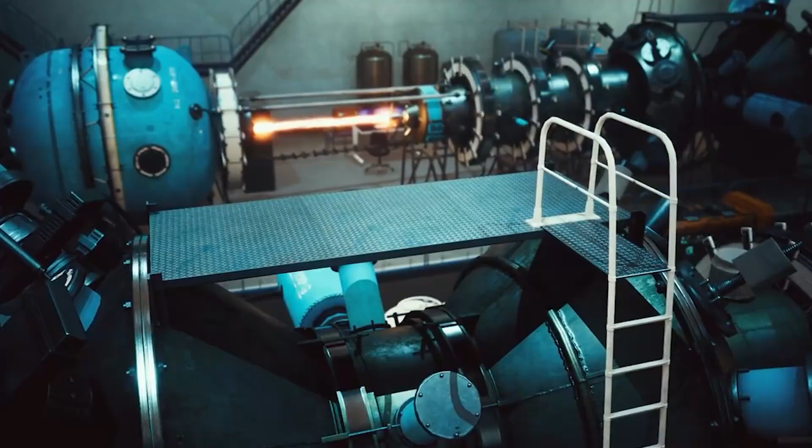And India has achieved a milestone in its civil nuclear program with the country's most advanced atomic reactor. Beneath India's dust, heat, and exploding demand, a strange buried metal is pulling nuclear science in a new direction. Not oil, not gas, not sunlight, thorium. And if India can finally make it work, this reactor could change how an entire nation thinks about power.

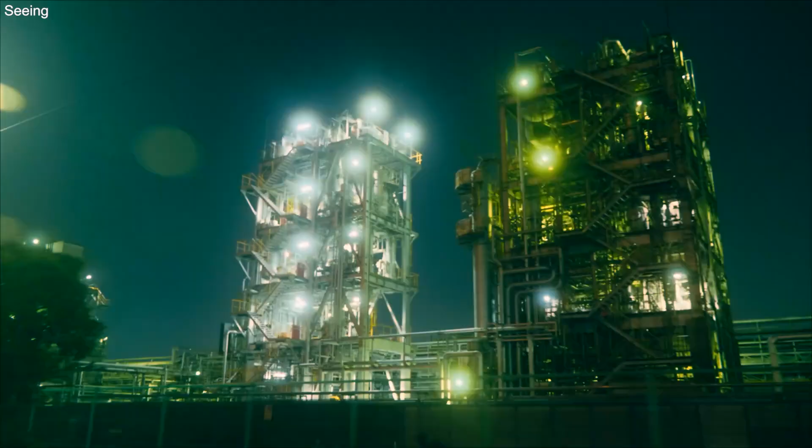The energy hunger of a rising India. India does not need a little more electricity. It needs a lot more and fast. Cities keep expanding, factories keep running deeper into the night, and digital infrastructure keeps multiplying behind the scenes. Every new layer of growth adds pressure to the same system, the grid.

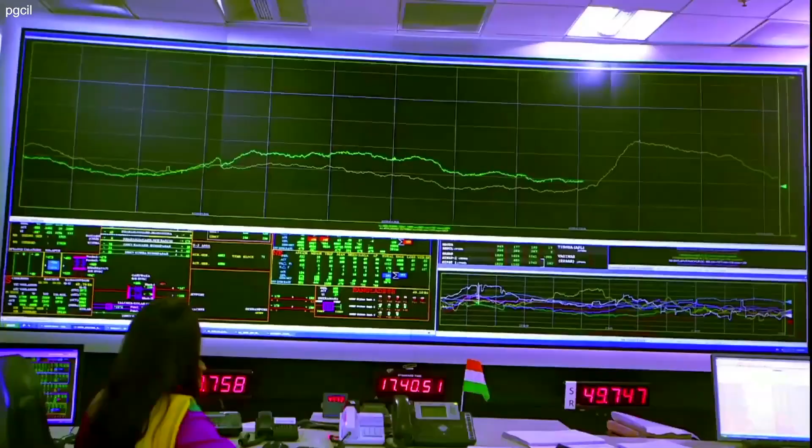That is why energy in India is not just about utility bills or power plants. It is tied to industrial growth, national resilience, and long-term stability. A country building at this scale cannot rely on short-term fixes forever. It needs sources of power that can keep up for decades, not just election cycles.

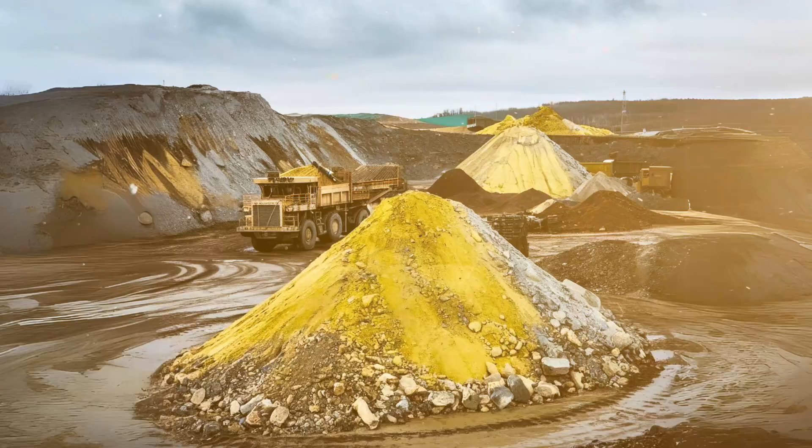And that pressure is exactly what pushed India to think differently. Instead of asking only how to produce more power right now, Indian nuclear planners began asking a harder question. How do you build an energy future around the resources your country actually has? That question leads straight to thorium. Why thorium became India's nuclear obsession.

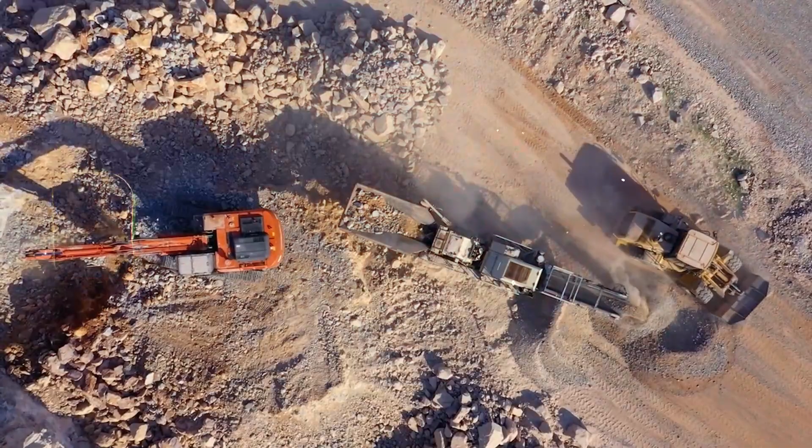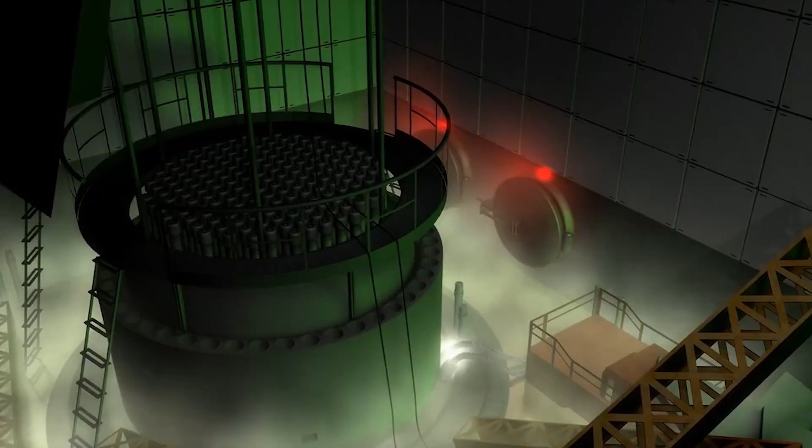For most countries, thorium is an interesting side note. For India, it became strategic. The reason is simple. India has limited domestic uranium, but it has large thorium resources. That imbalance shaped the country's nuclear thinking for decades. Suddenly, nuclear power was no longer just about copying the standard path followed elsewhere. India needed a system that could start from one fuel reality and gradually move toward another. Thorium became important not because it was trendy, but because it matched India's geology.

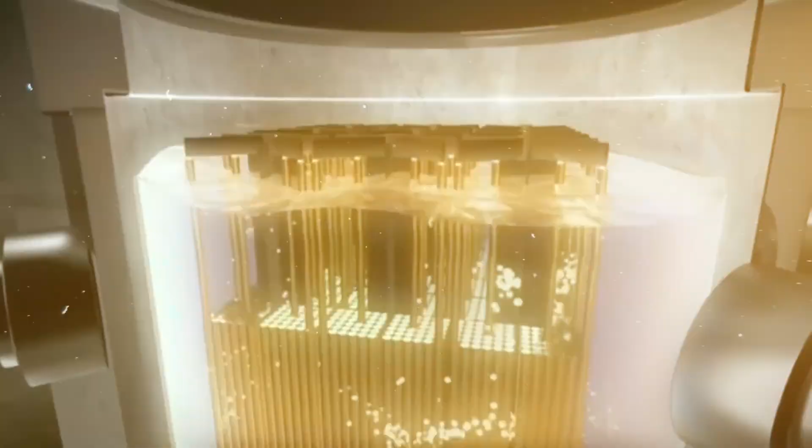But thorium comes with a catch. It is not a ready-made miracle fuel. It cannot just be dropped into a reactor and expected to behave like conventional fissile material. That is why India's thorium push was never really about one metal alone. It was about designing an entire long-term national pathway around it.

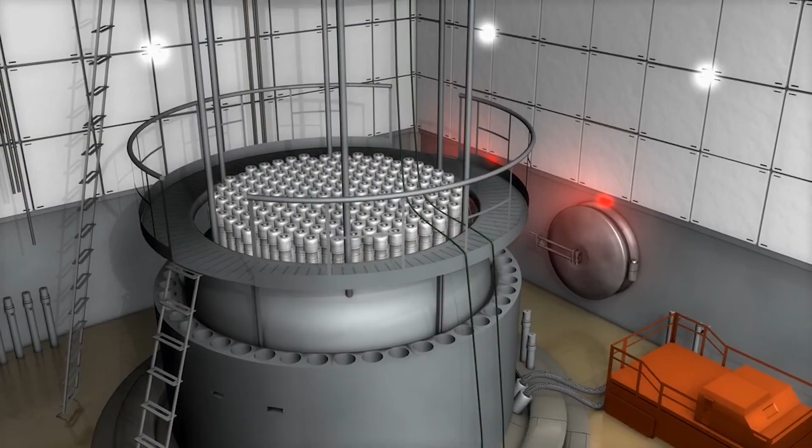The three-stage plan that changes everything. India's thorium story only makes sense when you see the full roadmap. This was never meant to be one reactor showing up and changing everything overnight. It is a three-stage nuclear plan, and each stage prepares the ground for the next.

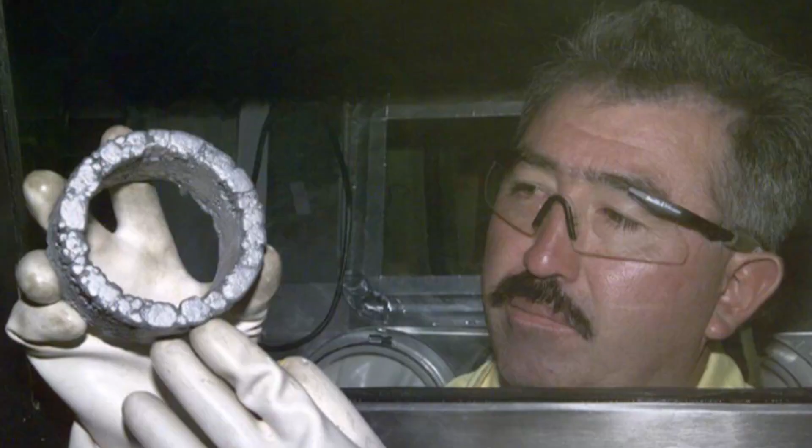The first stage uses pressurized heavy water reactors running mainly on natural uranium. These reactors generate electricity, but they also do something more important for the future. They produce plutonium in spent fuel. That plutonium becomes essential for what comes next.

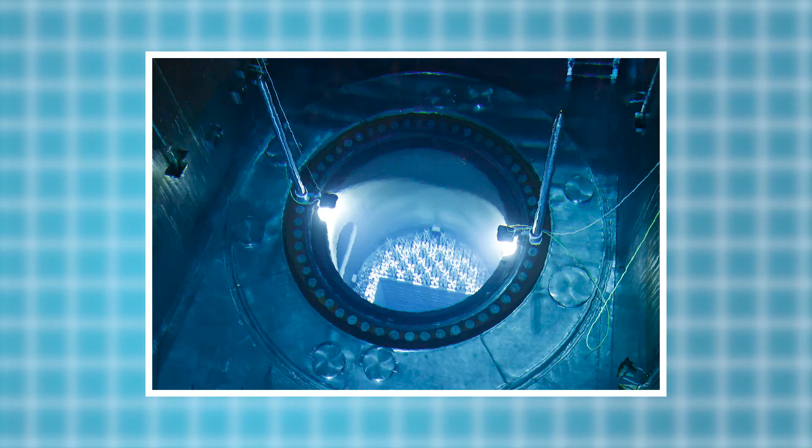The second stage moves into fast breeder reactors. Here, the system is no longer just making power. It is breeding more fissile material and helping create the conditions needed for the thorium pathway to become possible. This stage acts as the bridge between India's current reactor base and its long-term thorium ambitions.

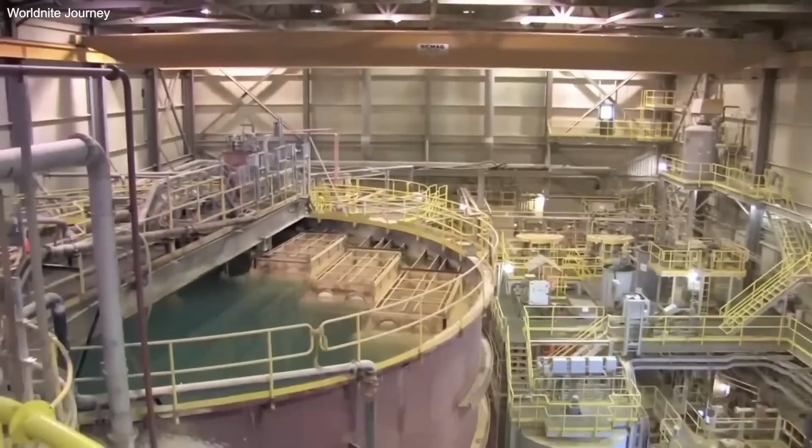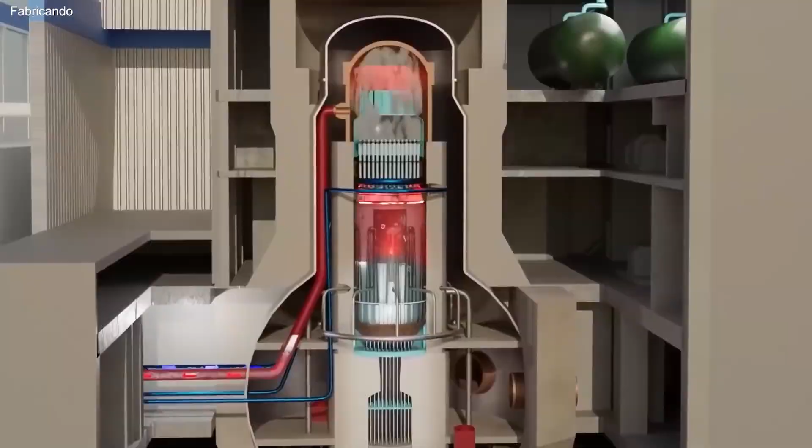Only then does the third stage begin to open up. This is where thorium-based systems can operate at meaningful scale using uranium-233 in a broader thorium cycle. So the real story is not a single invention. It is a patient nuclear ladder built step by step, with thorium waiting at the far end of it.

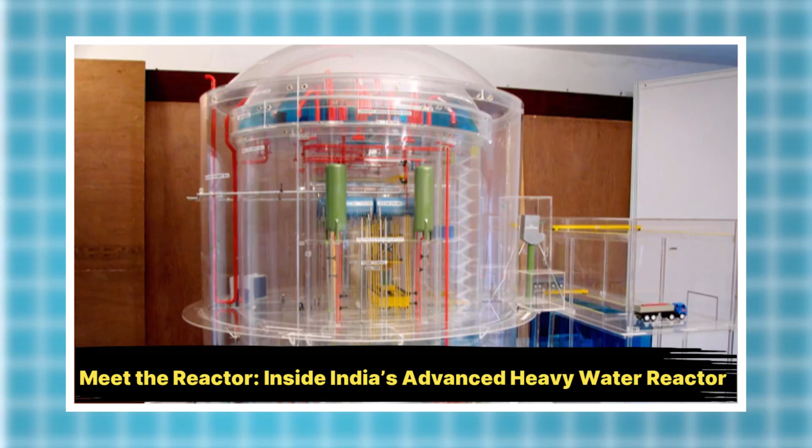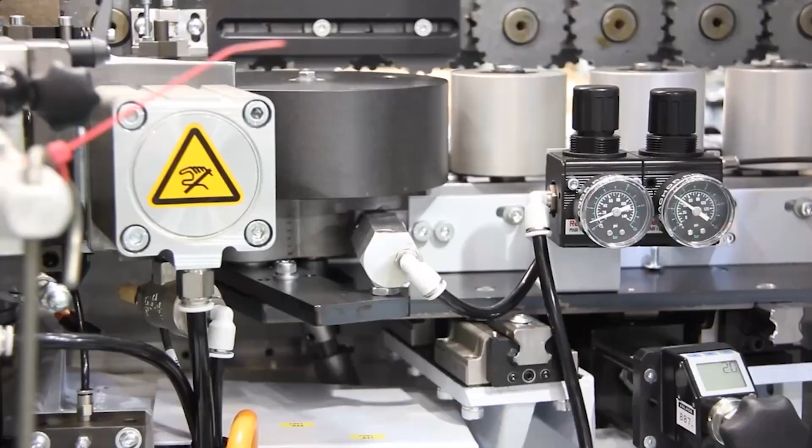Meet the reactor. Inside India's Advanced Heavy Water Reactor. At the center of this vision sits the Advanced Heavy Water Reactor, or AHWR. This is not meant to be some magical final machine that instantly powers all of India. It is a 300 megawatt electric design created to demonstrate technologies needed for large-scale thorium utilization.

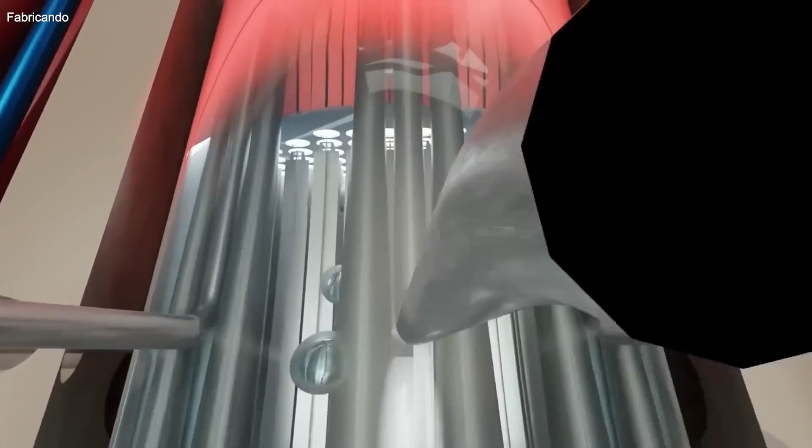That role matters. The AHWR is important, not because it finishes the mission, but because it proves whether the mission can realistically move forward. In India's thorium strategy, this reactor is a bridge between concept and system.

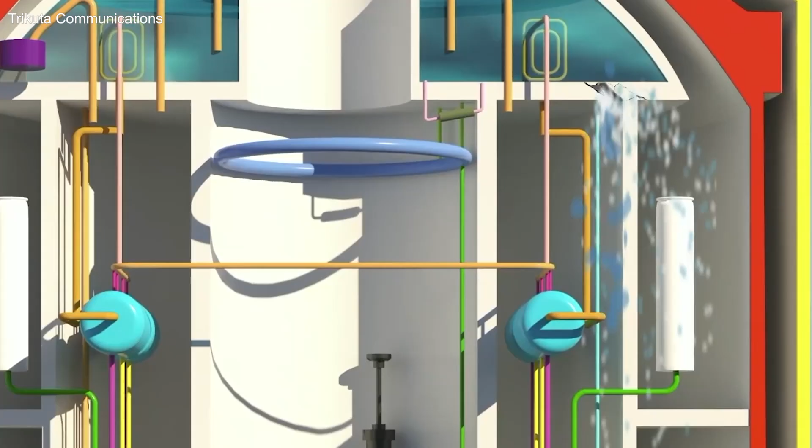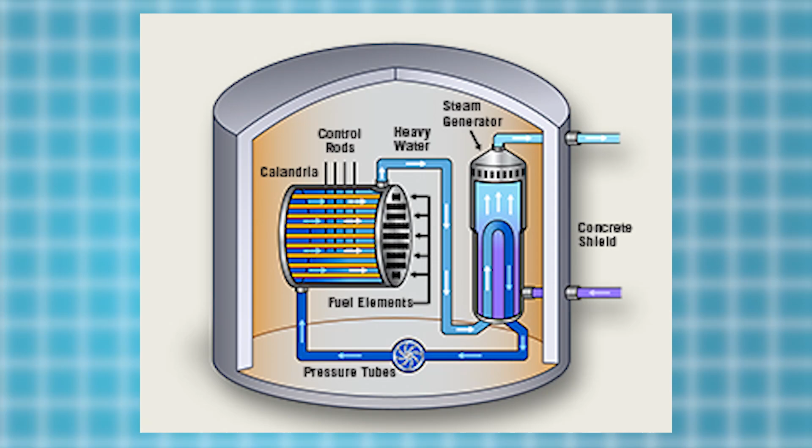Its design also reflects how tailored this project is. Rather than simply copying a familiar uranium reactor from abroad, the AHWR was shaped around India's own long-range goals. The machine is not trying to look futuristic for headlines. It is trying to solve a very specific national problem.

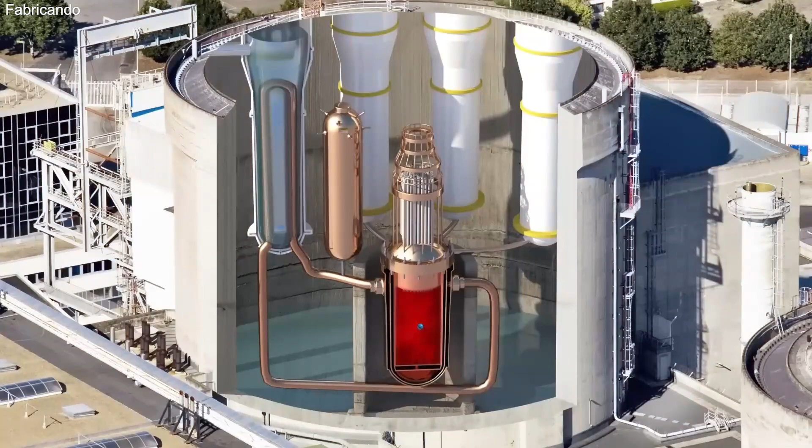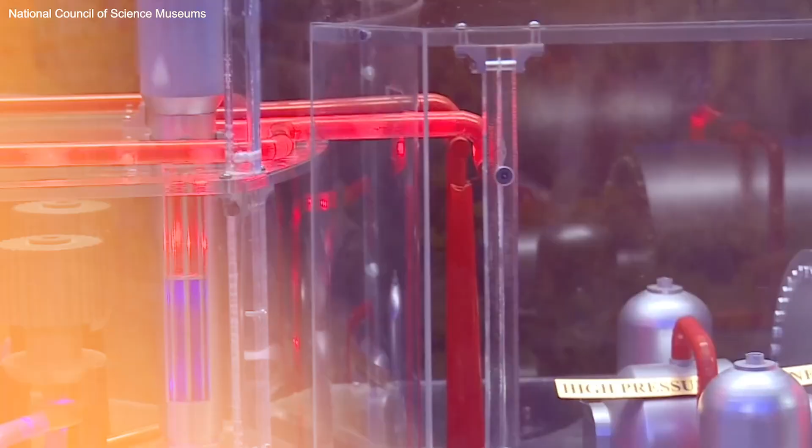How this reactor actually works. This is where the story becomes less about ambition and more about physics. Thorium does not generate power in a reactor all by itself. It needs support from fissile material to begin the cycle. That is why the AHWR design uses a carefully arranged combination of thorium-based mixed oxide fuels that include uranium-233 and plutonium. The logic is deliberate.

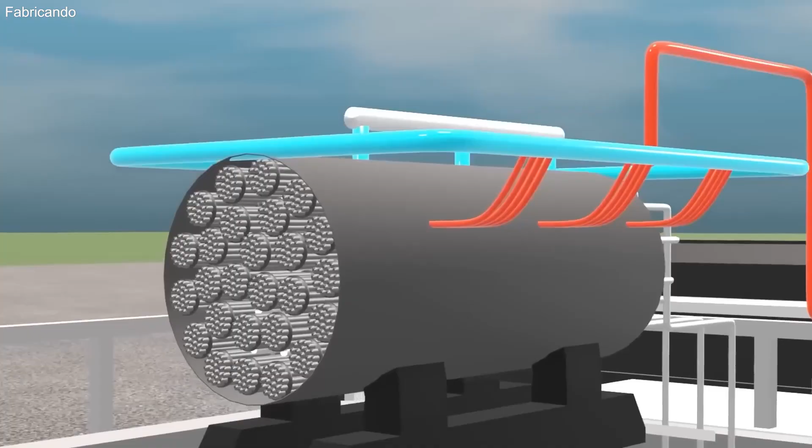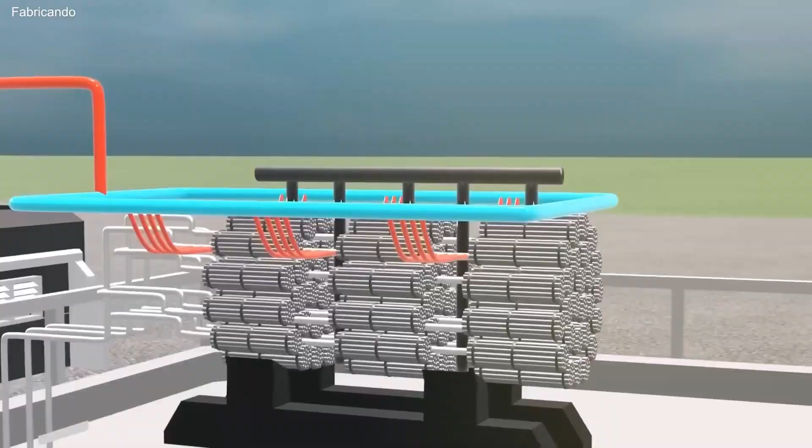Thorium enters the system not as a shortcut, but as part of a controlled chain. Over time, the reactor is designed to help sustain the production and use of uranium-233, which gives thorium its long-term nuclear value. That is what makes this reactor so significant. It is not just about burning fuel. It is about proving that thorium can function inside a real engineered cycle, rather than remaining a laboratory idea or a political slogan. If that cycle holds together, then thorium stops being theory and starts becoming infrastructure.

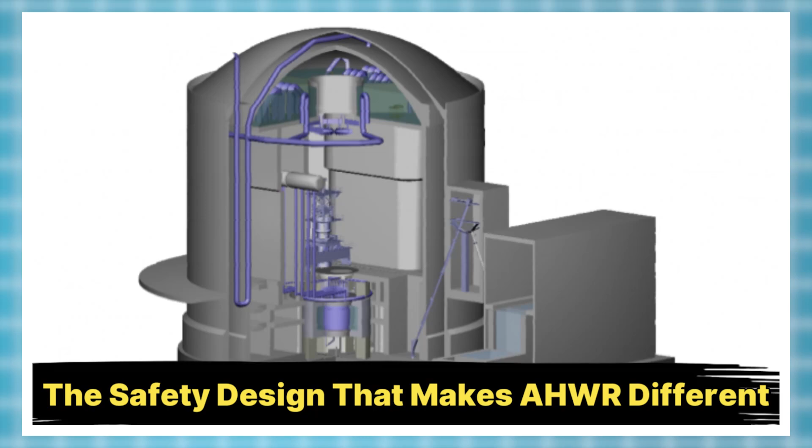The safety design that makes AHWR different. Power alone is never enough in nuclear energy. The harder question is, what happens when systems fail, heat rises, or operators lose time? That is where the AHWR tries to separate itself from older nuclear anxieties. Its design places strong emphasis on passive safety. In simple terms, that means key safety functions rely more on built-in physical behavior and less on rapid human or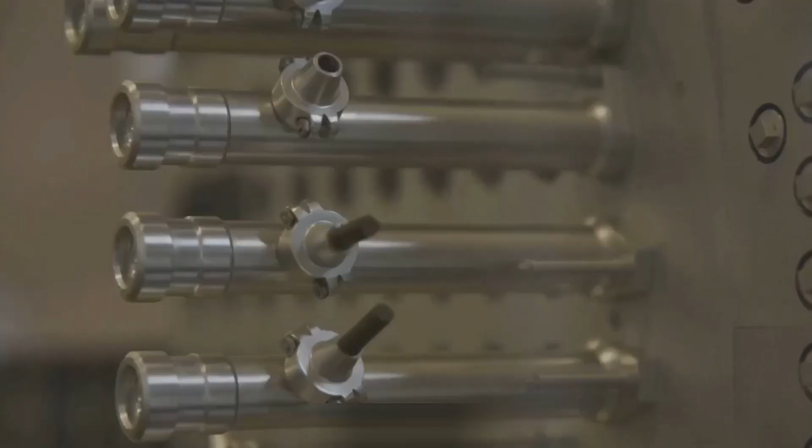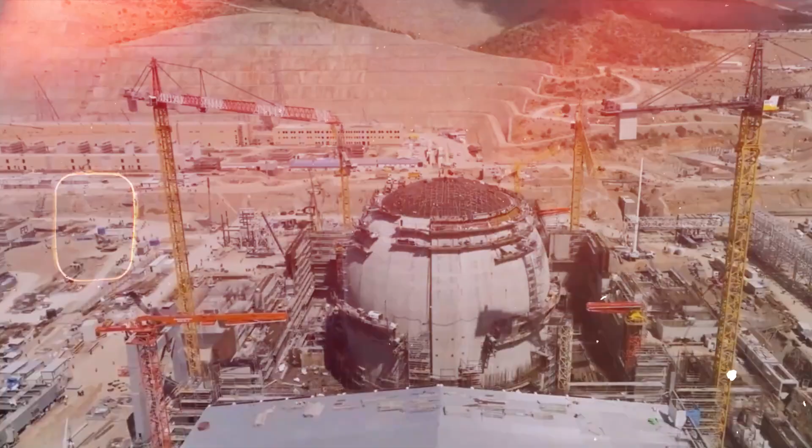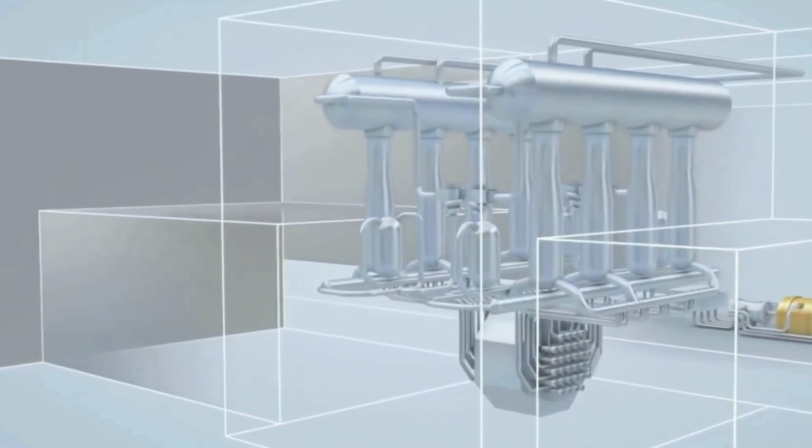mechanical intervention. One major example is natural circulation, where coolant flow depends less on the kind of large active pumping systems many people associate with conventional reactor designs. The broader idea is clear. When conditions worsen, the reactor should not become instantly more dangerous, because everything depends on perfect reaction speed. The AHWR is meant to buy time, slow escalation, and stack multiple layers of protection into the design itself. That matters because any serious thorium future has to win trust, not just attention.

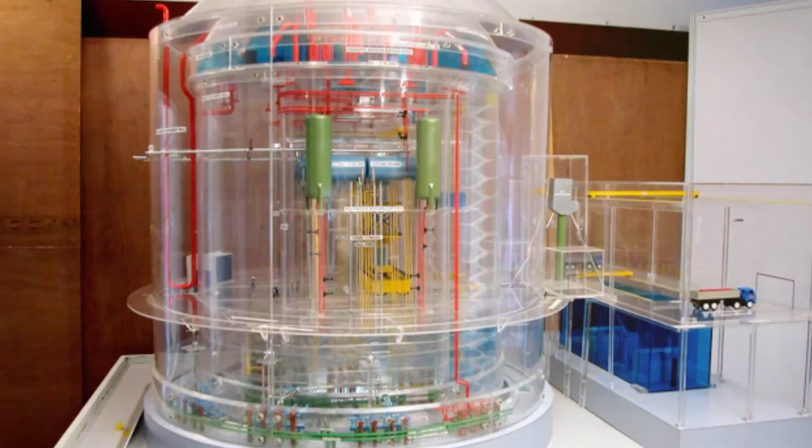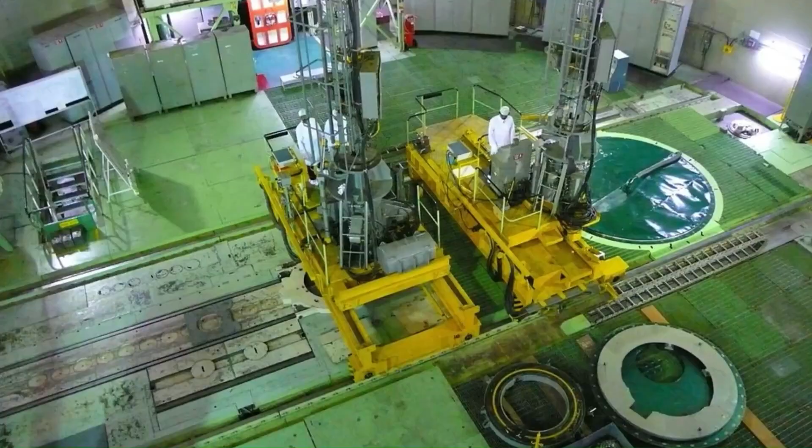The catch no one can ignore. Now comes the part hype usually skips. India's thorium vision is real, but it is not close to becoming an overnight national power solution. The biggest reason is structural. Thorium depends on the success of everything that comes before it. India still needs breeder progress, reprocessing capability, fuel fabrication capacity, and the wider support systems that make the third stage possible. Thorium cannot bypass that chain. It has to wait for it.

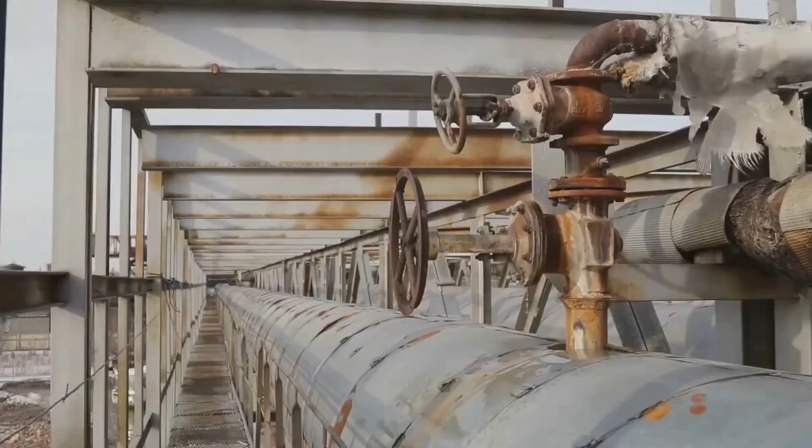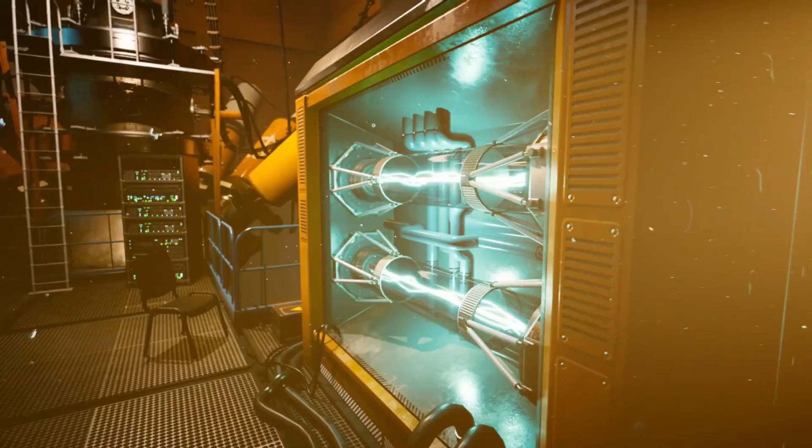That is why this story should not be framed as a near-term miracle. The challenge is not imagination. The challenge is sequence. Every delayed link in the system pushes thorium further down the timeline. So the real obstacle is not whether the reactor sounds impressive in a headline. It is whether the entire supporting ecosystem can mature in the right order.

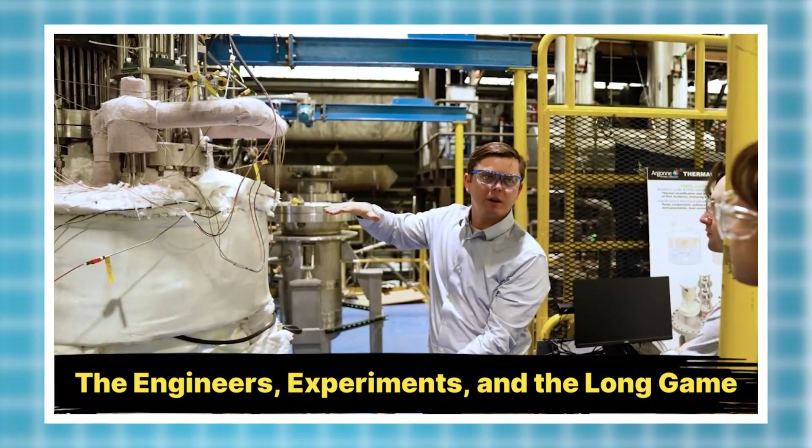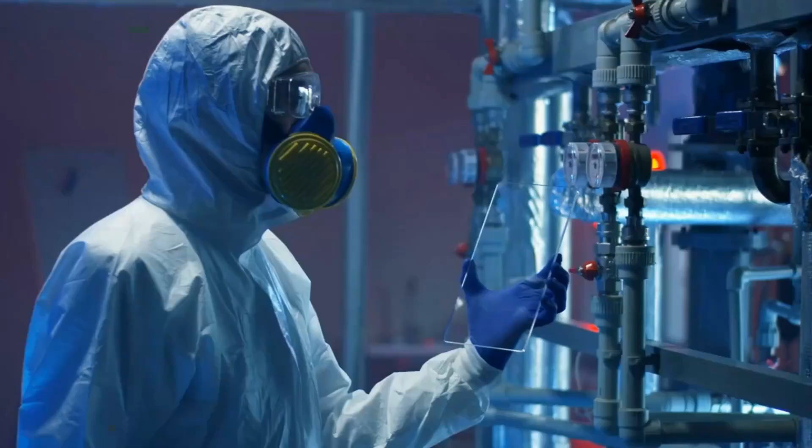The engineers, experiments, and the long game. What makes this program fascinating is that it does not move like a media event. It moves like a relay. One generation of scientists and engineers builds part of the pathway, then hands it to the next. Reactor design, material science, reprocessing, instrumentation, and fuel cycle research all have to advance together. That is why smaller research infrastructure matters so much. Even low-power experimental facilities play a huge role because they generate the data needed to validate reactor behavior and confirm whether design assumptions actually hold up.

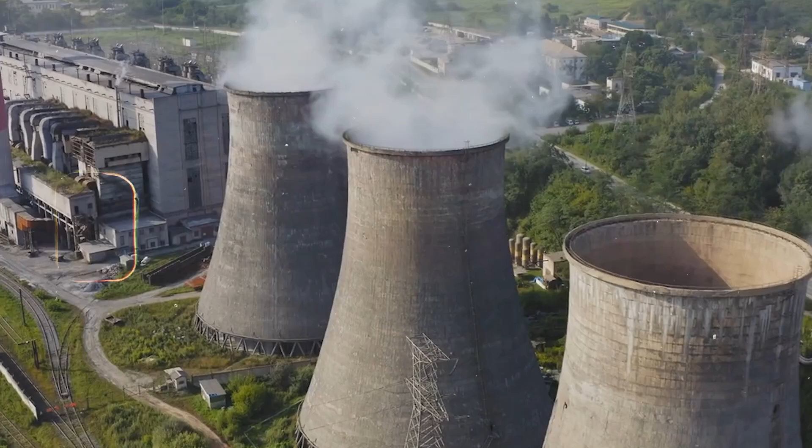And the wider program is still moving. India's Prototype Fast Breeder Reactor reaching first criticality on 6th of April 2026 matters because it shows the bridge stage is not frozen in theory. It does not mean the thorium era has arrived, but it does mean the long game is still advancing, one technical milestone at a time.

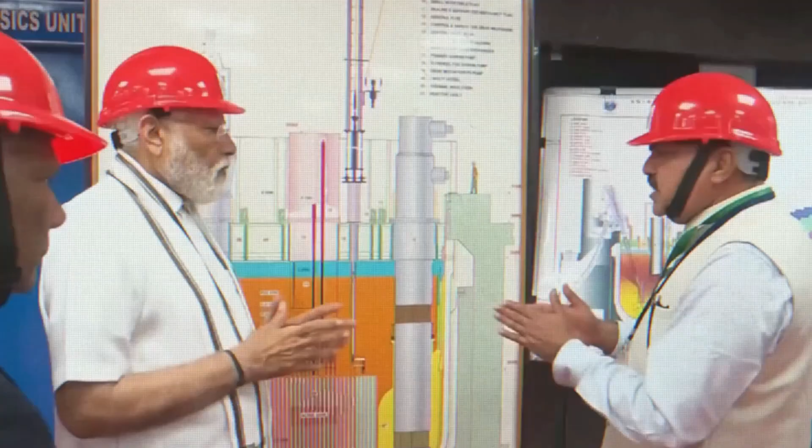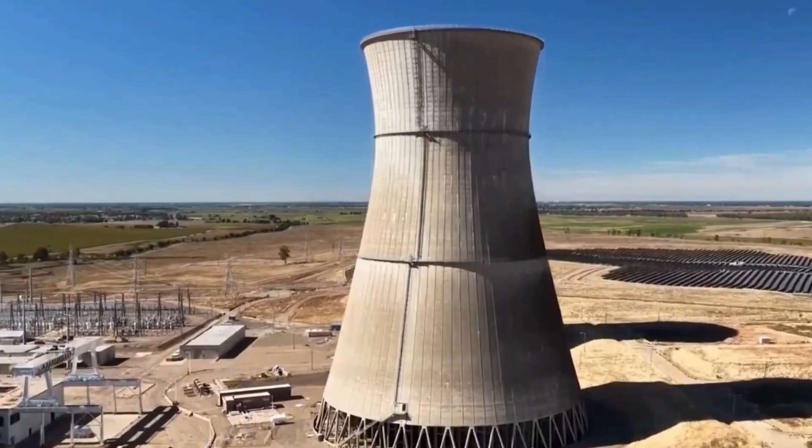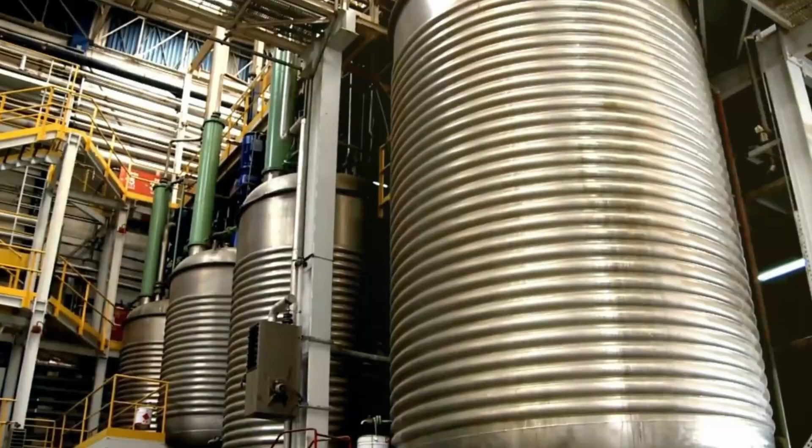So, is this really infinite energy? Not literally, and not yet. Thorium is not infinite, and India is not on the verge of flipping a switch that suddenly unlocks endless power. The honest version of this story is more grounded than the headline, but also more impressive. India is trying to build a nuclear future around its own resource base, using a plan that unfolds over decades rather than months. The AHWR is important because it represents a serious attempt to turn thorium into a working energy system. Not a fantasy, not a miracle, a system.

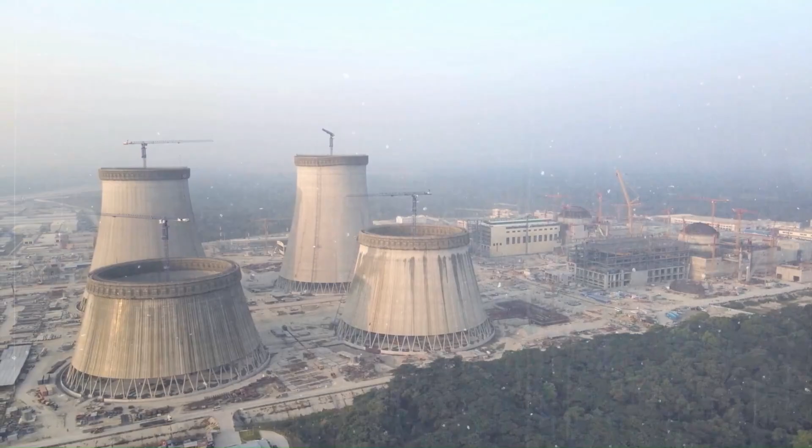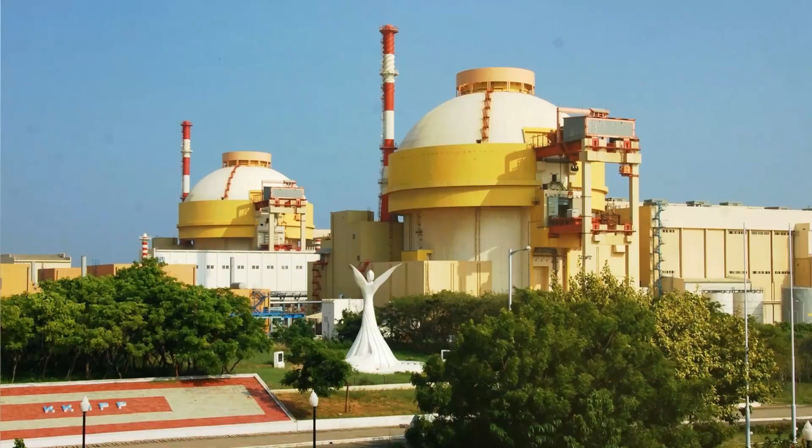And if that system matures, it could give India something very few nations ever achieve. A long-term nuclear path shaped around domestic strategic logic instead of imported fuel dependence. So no, this is not infinite energy. It is something harder to build and easier to believe in, a patient national effort to create power that can endure. And honestly, that may be the more powerful story.